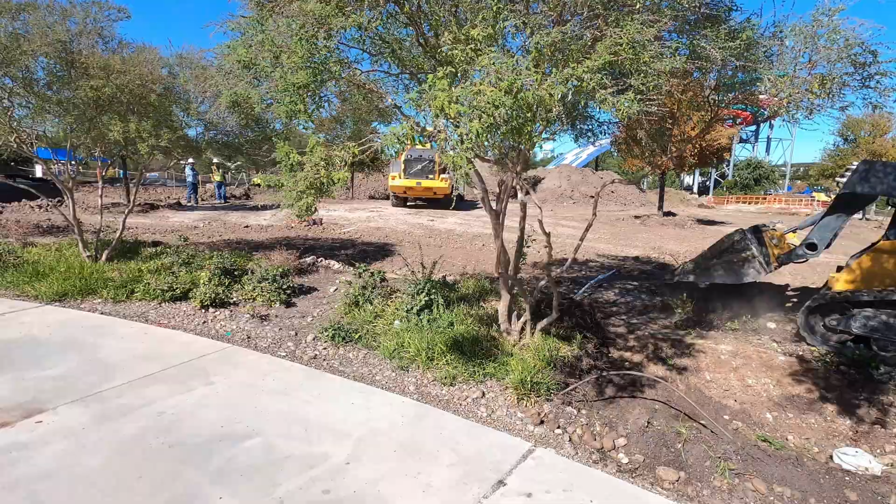Afternoon, team. I don't know if some of you guys recognize this area. This is where the new attraction's going.

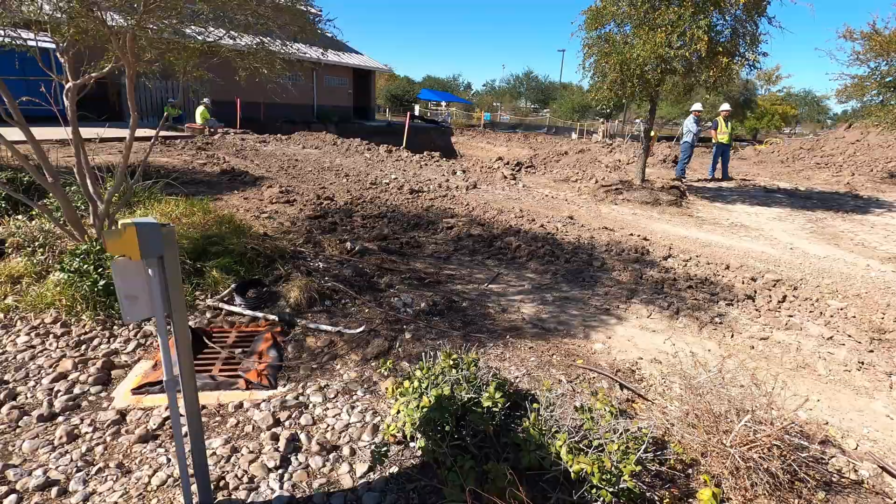Lots of moving dirt already. You can see a lot is going on. This is the pit for the pump house.

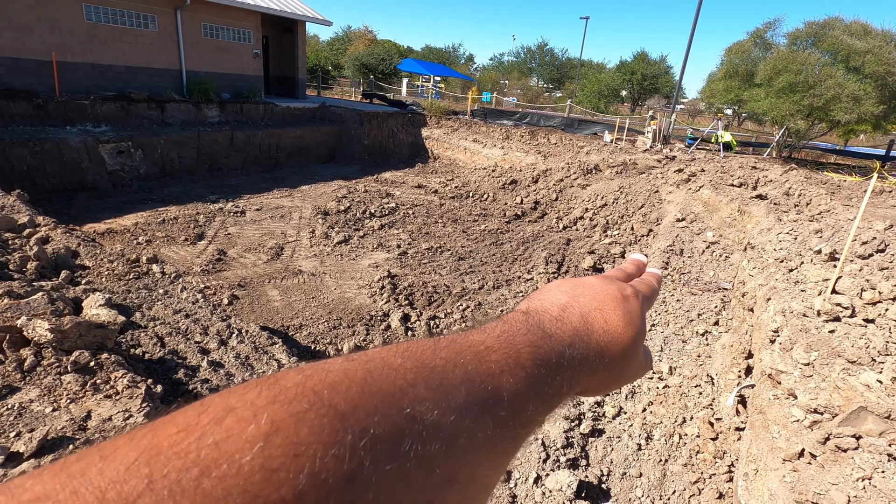Looking good, looking good. We'll have spread footers coming in this direction right here, all the way around the pump house, spread footers. The pump house right here, in this section of the pool, it's going to be another 3 feet deep. That'll be the surge pit. And then we'll have steps in the back within that area.

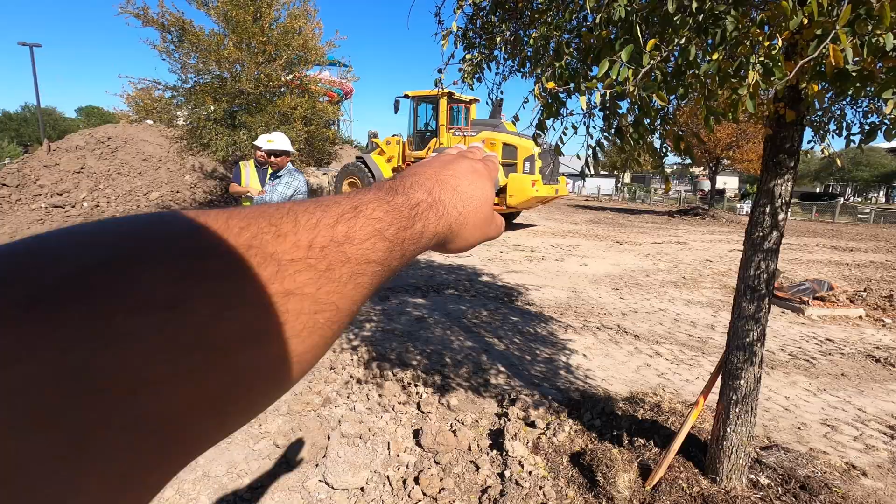It's looking real good. The slides will start in this direction, in this area. All right, since they're not running the machine, I can walk over here a little bit.

So a lot of this dirt right here, hopefully the sun's not too bad, but a lot of this is going to be even. The concrete path is going to be even with the current splash pad area. So right here, that's going to even out. We're going to have to drop it down enough to get the concrete pad poured.

All this is going to be a splash pad coming around. This is a splash pad. We're going to have a set of steps right here, little steps coming around, and then the slides will be in this direction over here.

And you see we got a bunch of dirt here piled up. So all of this dirt is going to be used to help build the ramp and the wall. There's a big ramp and wall that's going to be in this back area.

Let me see where this guy's going with the Mini X. I don't want to be in his way.

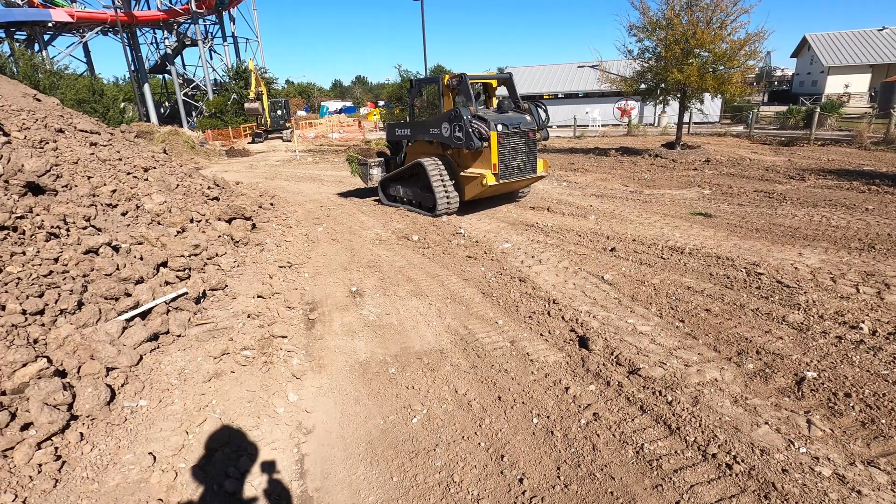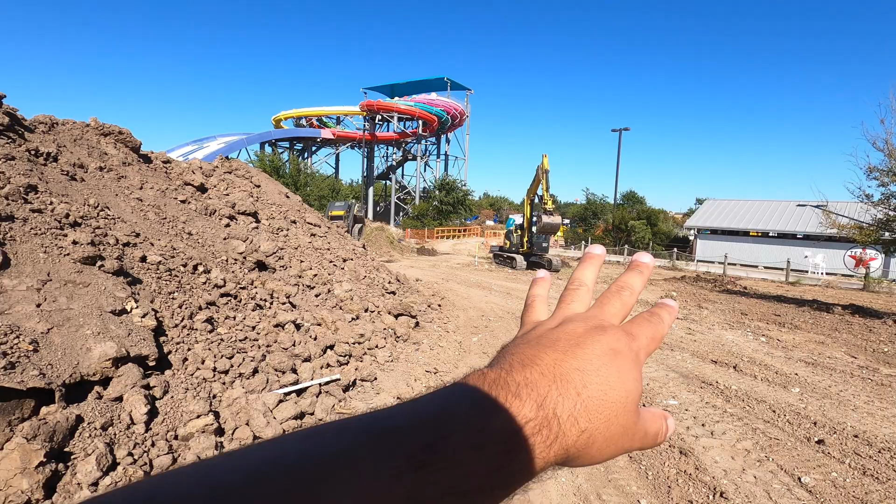There's going to be cabanas in this area. All the way down the line of the lazy river will be cabanas. And in this area, we're working on it, but we're looking at possibly phase 2, looking at double-decker cabanas to go around the river and overlook into the mat racer, all that area. It's going to be pretty cool.

Okay, nobody's in there, so I'm clear.

See all this wire. Wow, it's a lot of wire.

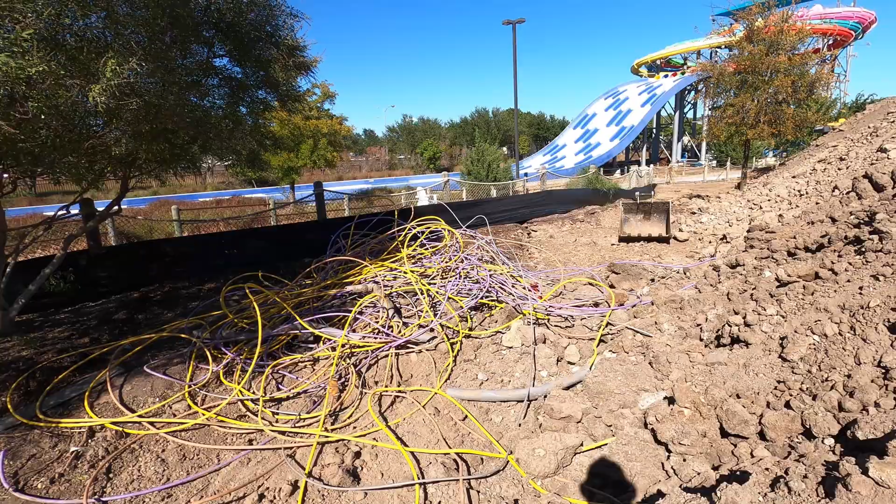Okay, so the retaining wall starts about 6 feet from the current wall over there. The retaining wall will go around, loop around, and then starting around right where I'm at in this area is going to be the path for the top of the slides, the first set of slides. And then the big slides will be over there. It'll be almost 10 feet high, this wall, this other retaining wall.

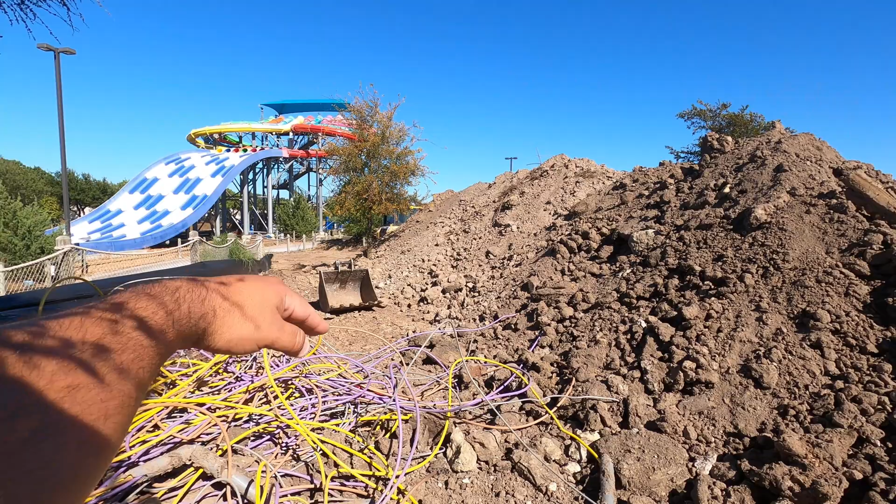So when you look over, you're going to be really seeing into the bottom of the river. All this wire is coming from the pump house way over there, and it's bringing it this way, and it home runs here at Pizza Shack. This is the pizza building.

But you can see, unfortunately, it was going right down the middle of this hole, so we had to cut it out, unfortunately. There's some conduit right there.

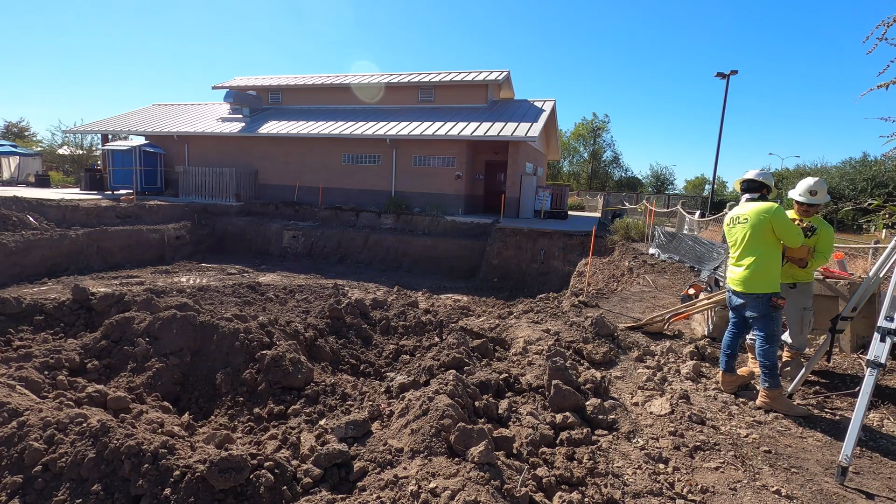And then our conduit for the, excuse me, what's it called, fiber line is in there too, but they had a clean cut on it, so we'll be able to reestablish. But you see it's pretty big already, and they still got to go a little deeper. Not much, a little bit deeper.

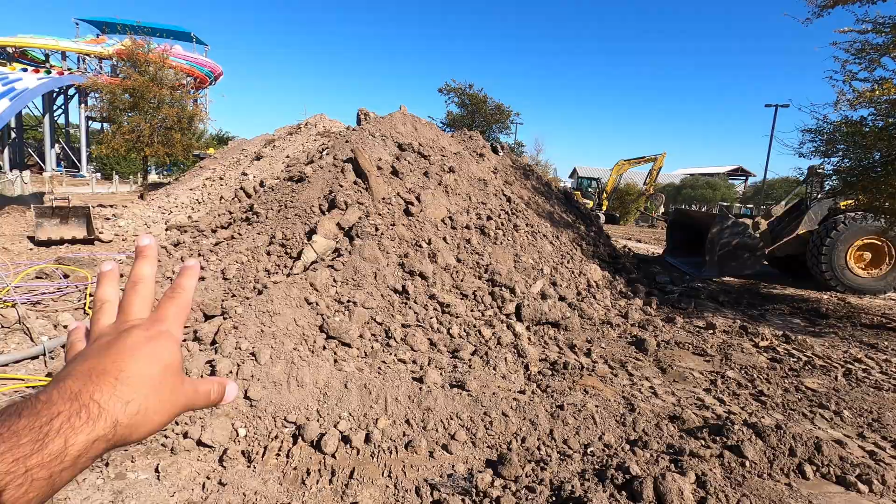Looking good. All this dirt, a lot of it's going to be reused. At first we thought we were going to have to import dirt, but it looks like we're going to have a lot leftover, so we're actually going to export some of this off the site. Because we still have to shave this down quite a bit, and of course all these trees are going to be gone. But yeah, we're getting there, boys and girls.

They don't have the tags anymore, but I'll show you on the drawings what this is going to look like as far as the pump house goes. Right there is going to be a little deeper, the surge pit. This is the bottom of the pump house. Over there, starting in that direction - let me make sure I'm looking at it right - in that direction there's going to be steps going down into it. But yeah, it's looking good. Got sewer right there.

Fantastic. All right, let's look at some plans. All right, team, listen, I'm at the house now. Okay, so let's look at the drawings here.

So, as you can see, everywhere - this is the demolition plan, by the way. It doesn't actually say it anymore, but this is the demolition plan. See, all this area right here had to be demoed. So we've already done all that.

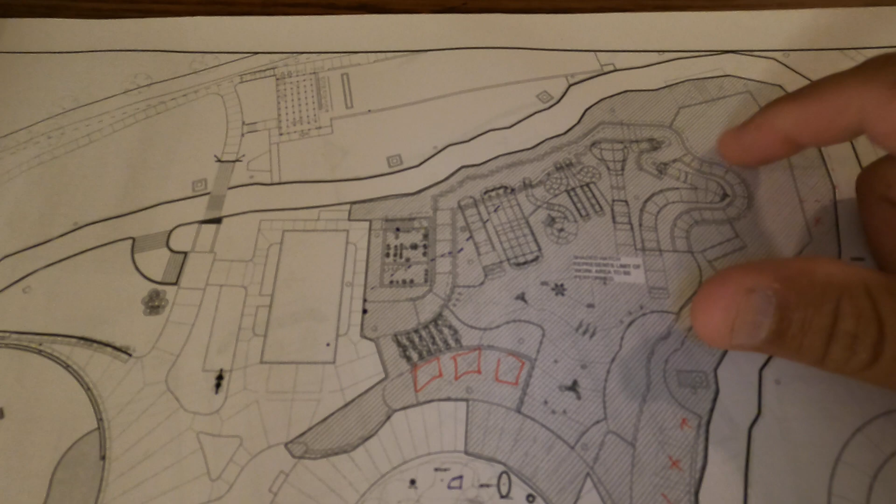There's the pump house, so you'll see where the slides are going to be. This is going to be like a green space. And then over time, you can't tell maybe, but you can see the outline right there - there's the cabanas, there's some over here too. These are double cabanas. All right, so let's see.

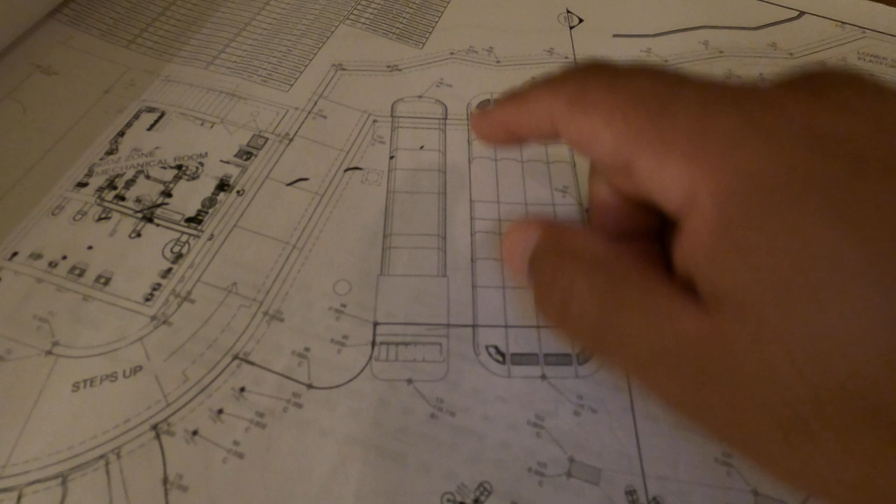All right, here's a little bit blown up picture of the slides. So you can see there's one - I can't think what they call it. That's the Pro Slide, it's just a family slide. This is like a little mat racer, except no mat racer - this is a mini bowl. This they call the kids octopus. This is a mini tornado and a mini aqua wall. I can't remember what Whitewater or Pro Slide calls it.

Uh-oh, what do you want, dude?

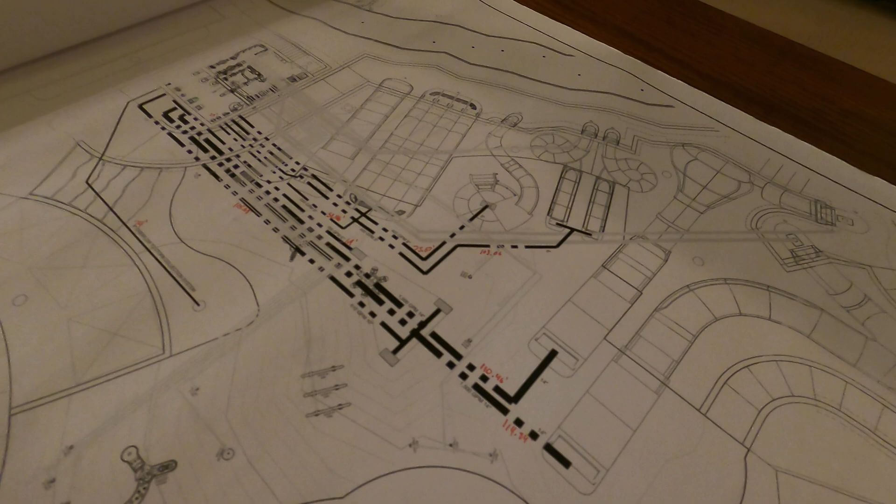Okay, here's the plumbing plan. These are for the main drains going back into the surge pit. These are all the main lines going from the pump house to all the kids' slides and the attraction, or the little splash pad stuff. So you'll see here's all the splash pad stuff. Here's all the slide pumps, and you can see there's tons of them, tons of pipes coming out of here.

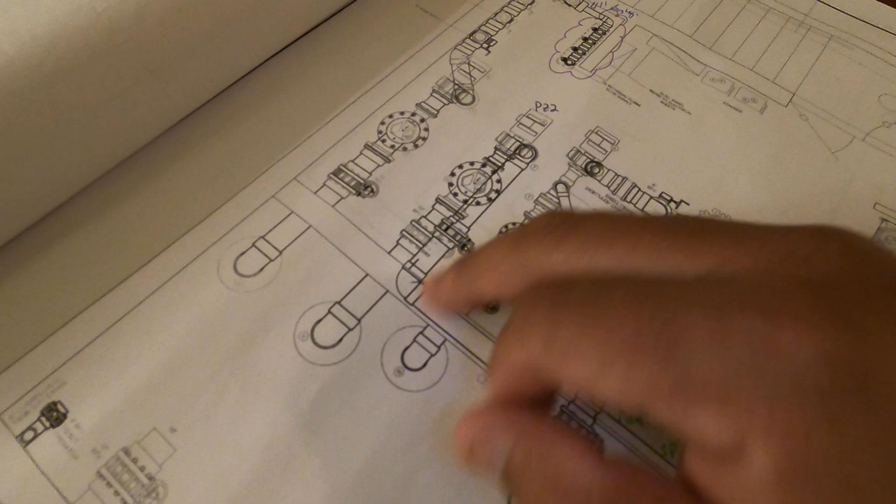All right, so here's the pump house. So this one right here is for all the smaller slides. This is going off of a manifold, right? These are all the different little slides for the manifold. This is for one of the slides - I think it's their tornado slide.

This is the filter, so the filtered water will actually push through all the toys. There are going to be some returns, but most of them are going to be through the toys, the water flow.

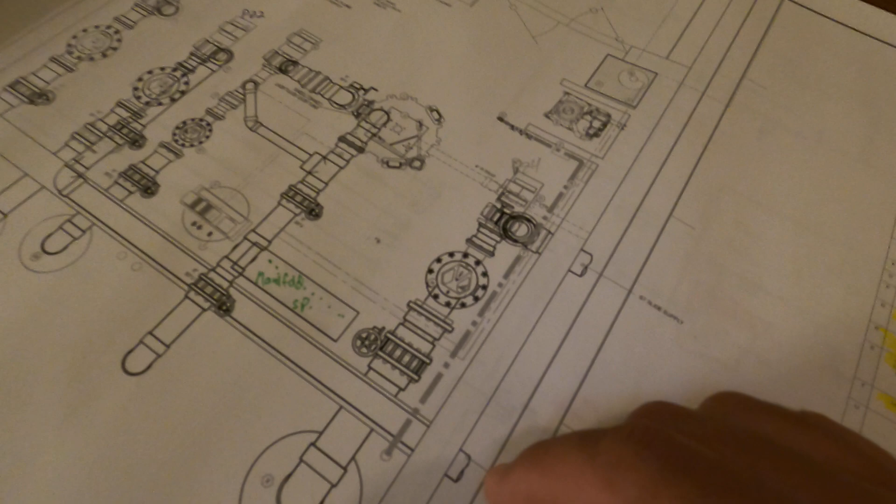And then, you know, we got to build a manifold for all that. But yeah, you'll see there's a manifold breakout right there. And then this one right here is for the other little raft slide. Okay, I showed you where the stairwell was going to be. Here's all the electrical that's going to be there. And of course, there's the surge pit.

Now let me see if I can get some elevations. Let's see what the elevations are. Let's see the elevations here. I would think it would... this is a side view, but it still doesn't give me - what's that number? Nope, still doesn't give me elevation. I don't know what that stands for - TF 127.

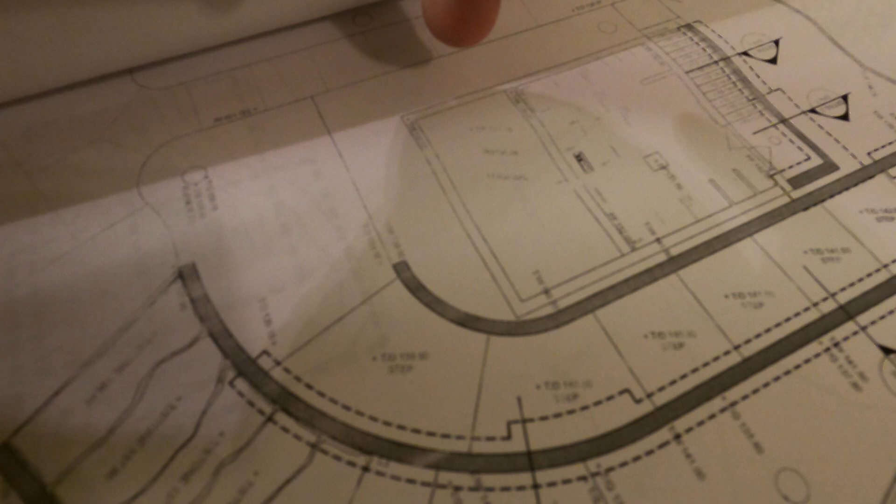So it's saying the water surface is going to be at 135. TF is 123 or 127 - kind of hard to read on this. I don't know what TF stands for - top of foundation, I think that's what it is. 127, so if that's the case, that's a pretty significant depth for the pump house, the surge pit. I'm going to have to really try and figure that out and ask some questions. So yeah, you'll see how deep it is.